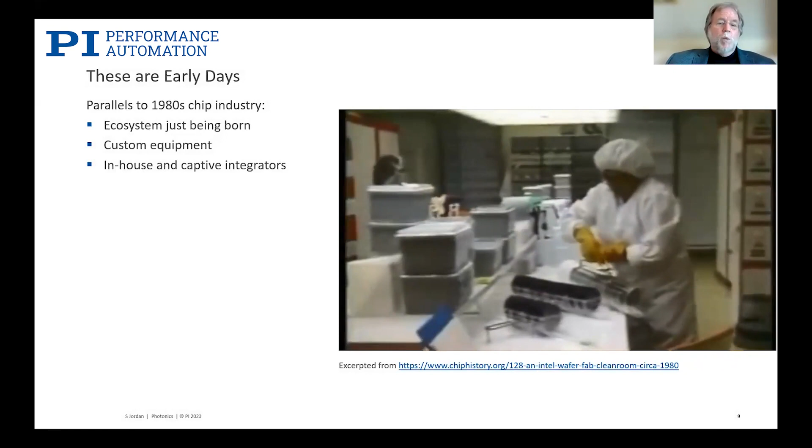As I said, the semiconductor industry showed us the way forward a long time ago. This wonderful video from the Chip History Museum is an Intel fab from the early 1980s. It wasn't that long ago. This is where the CPU for your father's or your grandfather's IBM PC was being manufactured. That's what you see. It should look familiar. Lots of manual processing, lots of people involved. Isn't that just like photonics today?

But this scene you see here with all this custom equipment has been supplanted today. Today you can build a fab just by issuing purchase orders, because all of these tool manufacturers have emerged since the early 1980s. Now this ecosystem exists. And this is happening in photonics. It's happening before our very eyes.

Now, the problem, though, if you look at an analysis of where the costs are in manufacturing a silicon photonic device, you'll find that 80% of the cost is in the packaging, and specifically in the alignment process, which must be repeated over and over again, starting at the wafer level.

When you have a wafer full of chips, whether electronic or photonic, you need to test them. You don't want to invest the cost of packaging a bad chip, so you need to test it to be sure the chip is good before the process begins. Because chips are easy to kill, you need to keep testing during the assembly process to ensure it remains functional as the process goes on. This repetitive need, starting at wafer probing and continuing through the packaging process, is what drives the cost of photonic devices today.

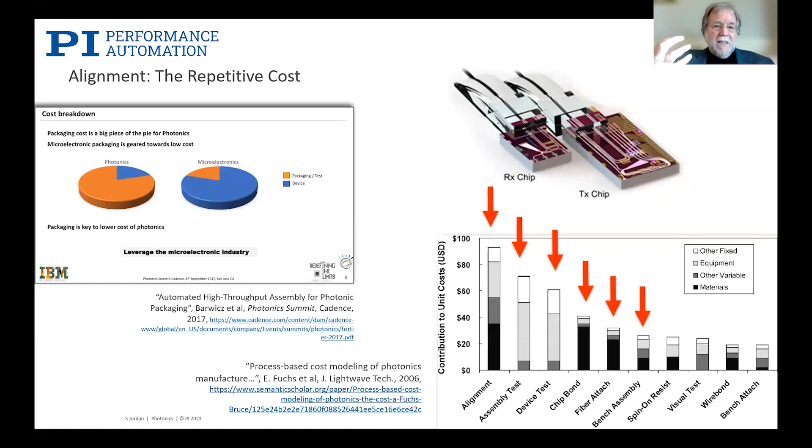Today's silicon photonic devices differ significantly from the photonic devices of, say, 1997 or 2000. They're multi-channel devices today, for one thing, so you have additional degrees of freedom involved in aligning all those multiple channels. You have a theta Z component, you have other thetas that must be correct. It isn't just in terms of transverse alignment anymore — there are also these angular degrees of freedom.

The problem is that with conventional alignment technology, every time you make a small motion in theta Z, you must stop and realign in X and Y. But there is this new technology that PI developed. It was introduced in 2016, less than a decade ago, and it won multiple awards, such as the prestigious R&D 100 award. It allows you to align simultaneously across multiple degrees of freedom, multiple inputs and outputs, multiple channels, all in one step. By doing these alignments simultaneously, we reduce the overall cost of alignment by 99%.

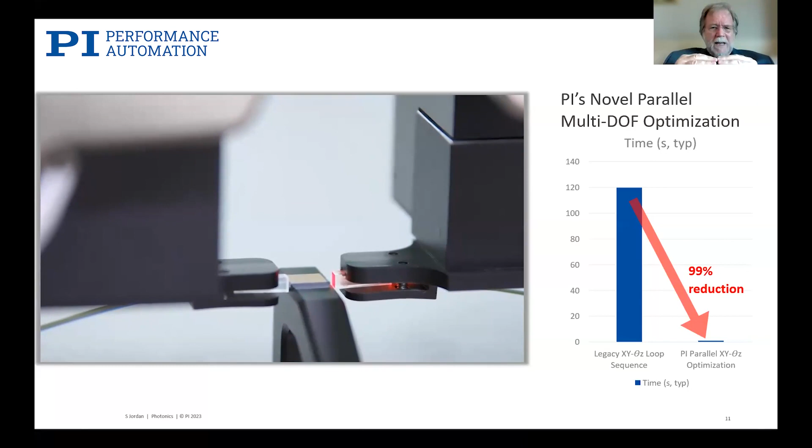Just for example, to do an alignment of an array device on a wafer can take a couple of minutes using conventional technologies. Using our technology, you could do a 6 degree of freedom alignment on both sides, input and output of these devices, in about 1 second. So that's where this 2 order of magnitude reduction in cost comes from — the unique ability to align these devices simultaneously across degrees of freedom, inputs, outputs, and channels.

Now, this is a technology that we have implemented across our product line. First, hexapod micro robots, which are highly stiff, highly stable, very rigid devices that can be mounted in any orientation and allow you to create a coordinate system wherever it makes the most sense for your application. That's very popular, and this multi-channel, multiple degree of freedom parallel alignment technology is

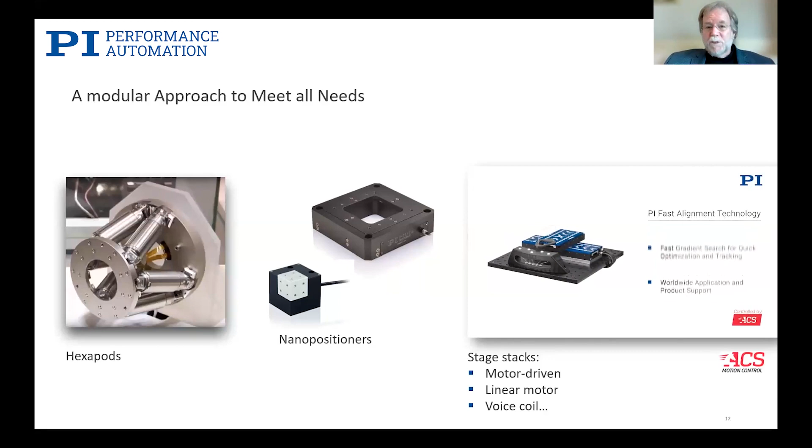just built into the command set of the hexapod controllers. Similarly, for our piezo devices, such as the popular nanocube, which is a 3-degree of freedom device, and now stacks of stages driven by the ACS controls. We purchased ACS, a very well-regarded industrial motion control manufacturer, several years ago, and now this technology has come to the world of ACS controls as well.

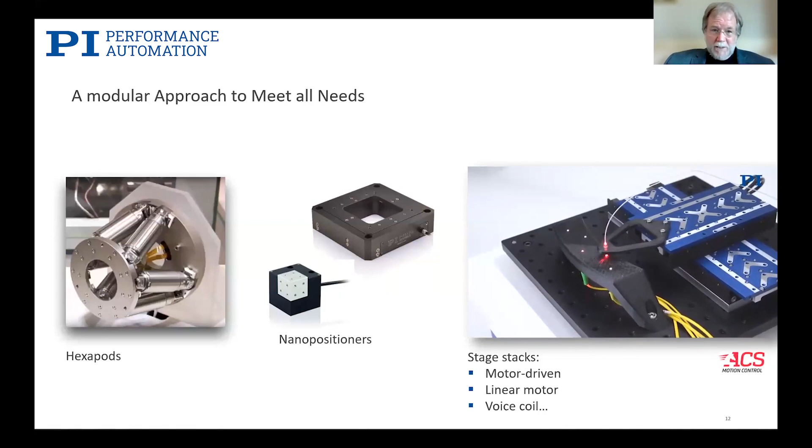So I'd like to say a little bit more about that. This gives us the flexibility to configure the optimal solution for your particular application. For hexapods, you have the benefit of this very flexible path planning and compact 6-degree of freedom, very rigid structures, no moving cables. With stacks, the modularity, the long travels, and everything driven by the ACS controls.

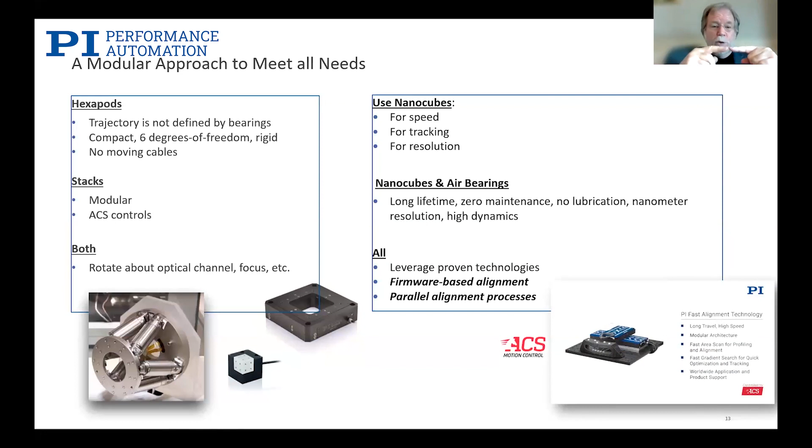Both of these allow you to rotate about a sweet spot, to be able to define a rotational center point where it makes the most sense for your application—for example, at the input to a waveguide or at the focus of a lens.

So we use piezo devices such as our nanocubes whenever there is the need for maximum speed, because piezo devices are just incredibly fast. Also, because they are flexure devices, there is no wear, no lubricants. That means they can perform long-term tracking—long-term can mean days, weeks, months, if you wish, because there's nothing to wear out in a piezo device.

Similarly, same comment for air bearings: long lifetime, zero maintenance, no lubrication, nanoscale resolution, and high dynamics. Those are the characteristics of both types of mechanisms.

And then all of these technologies leverage proven technologies, fab-class technologies. The alignment functionality is built into the firmware, which makes it fast, and the parallel capability is absolutely unique to PI.

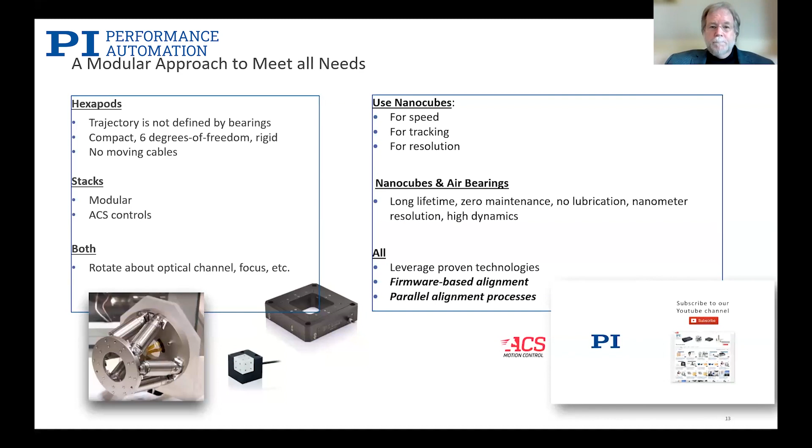So looking at some of the pluses and minuses here, now that we've expanded this to include our entire product line, you can see the virtual pivot point is available across all types of motion. Modularity is a strength of the mechanical stages, the stacks of stages. Speed is excellent for all of these, especially for nanocubes.

Tracking—long-term tracking—all of these can do tracking in the short term. Long-term tracking is something that air bearings and nanopositioners can do. Resolution is best in terms of nanopositioning and air bearing devices, and the mean time between failure is obviously going to be best for those mechanisms that have no wear at all.

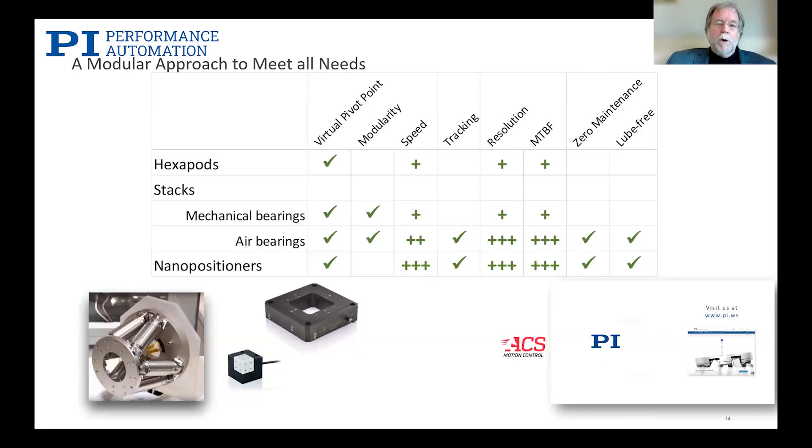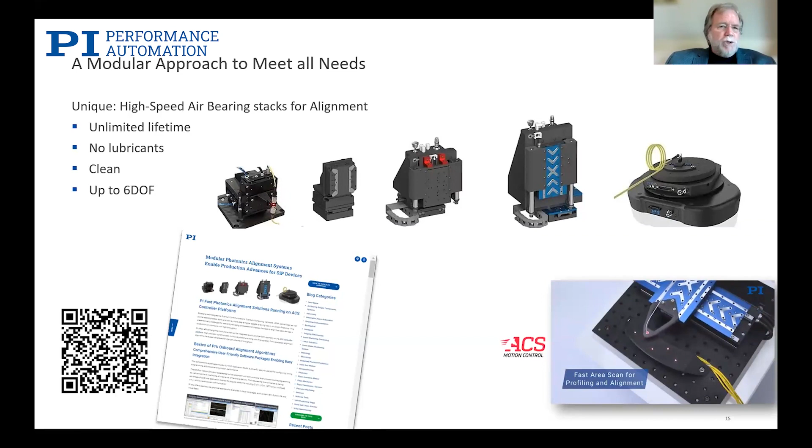This modular, expanded capability is our latest effort to serve flexible requirements. Every customer has different needs, every application is different. And we're seeing more and more large format applications with circuit boards, trays, large substrates where alignment and characterization needs to be performed over a large area. So this allows us to do that.

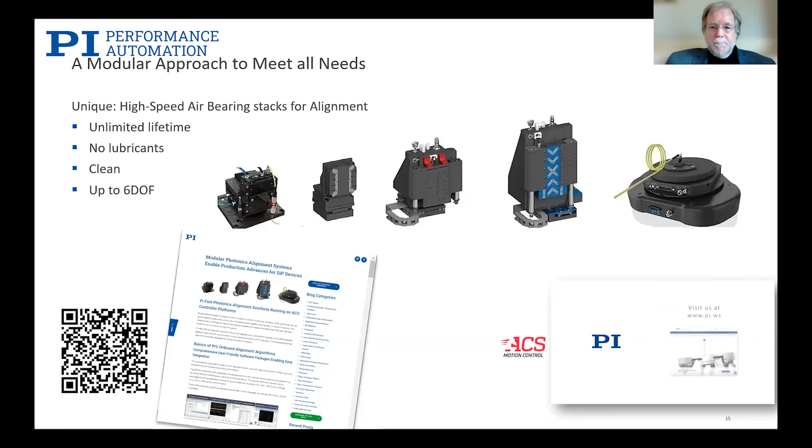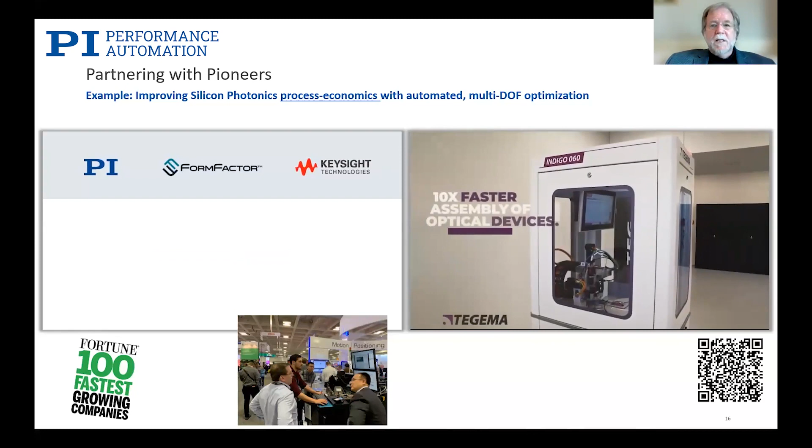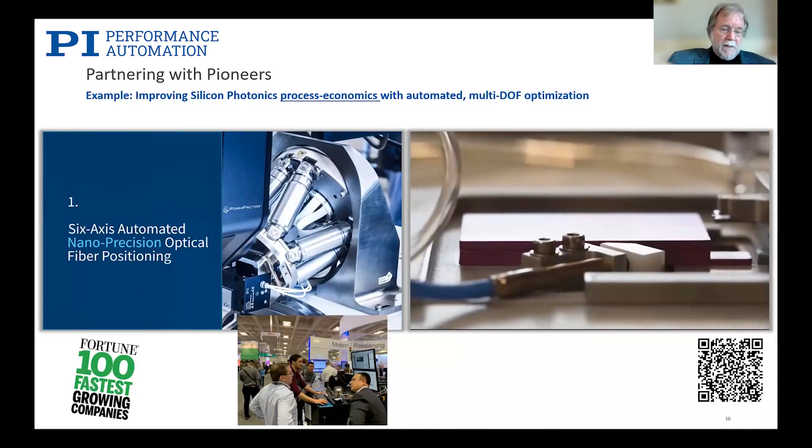Now, one thing that we have done in the 50-some-odd years of PI's existence: we have always prioritized working with the pioneers in the industries that we serve. For example, in the field of fast wafer probing, the pioneer in that field was FormFactor in 2016, showing the very first fast engineering probers that utilized this technology to revolutionize the speed and capability for testing photonic wafers.

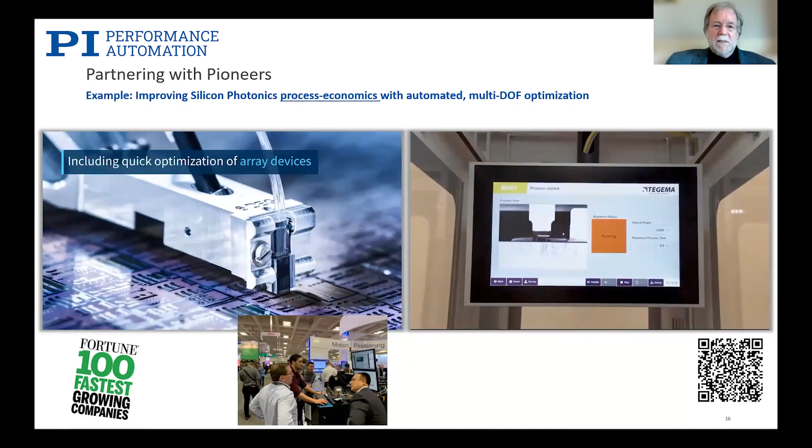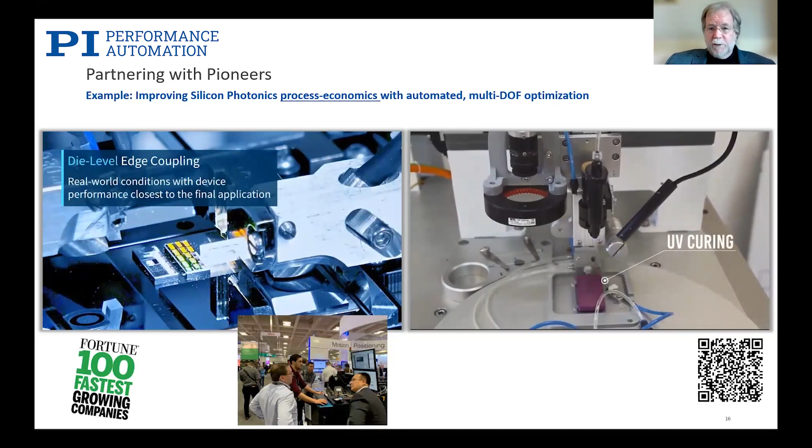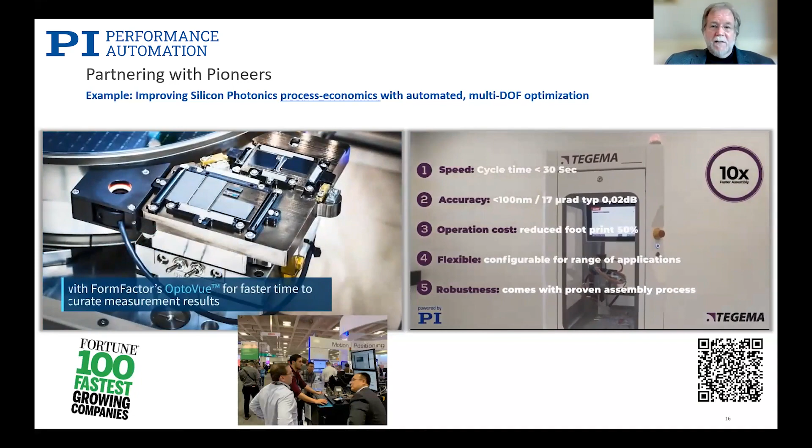Tegema is a tool manufacturer that makes assembly equipment that leverages this parallel technology that I've described. I had the great pleasure to play with one of their setups at the Photonic Integrated Circuit Conference a few months ago in Brussels. Their software is amazing, and really it is not only easy to use, fast and capable, but very capable of keeping pace with your needs and your devices as they evolve. Very, very recommended.

We've taken this approach to the whole ecosystem here. We work with contract manufacturers like Averna and GES, and with systems integrators and tool manufacturers. Remember that slide showing the Intel fab back in the 1980s? That ecosystem of tool manufacturers didn't exist then, it evolved since, and all these amazing companies sprang from that foundation. The same thing is happening now in photonics. It's a beautiful thing to see.

One thing we do: we recently opened our tech center here in Silicon Valley. This is a space for us to work with our customers, and it's also a resource for them. For example, we've had customers meet with their funders here, since they might not have an office of their own, so we help by letting them use our conference rooms and meeting spaces. Let me show you a little bit about that.

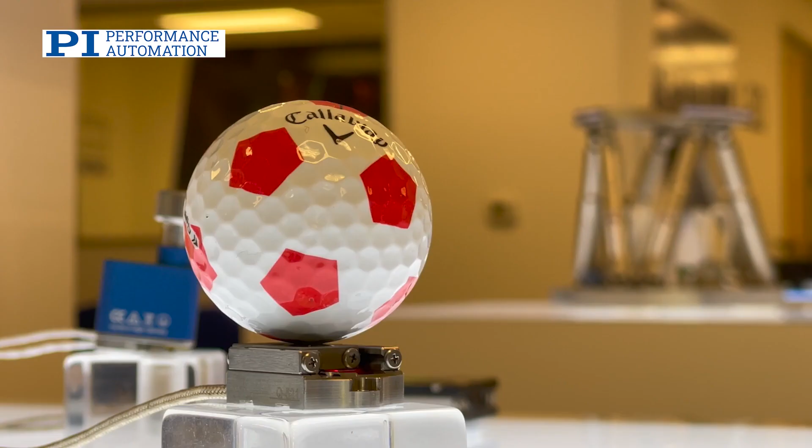Welcome to PI's Silicon Valley Technology Center. Here we address what's possible in the world of photonics today. We have a showroom with many examples of the equipment that we make, and this is the place where we have a team that can work directly with customers to solve advanced problems involving ultra-precision motion and photonic alignment.

Over in Europe, the phenomenon of pilot lines and consortia is one of the things helping drive innovation for the photonics field and others as well. In particular, there is the Photonics 21 initiative. It was established a decade ago, and it has been the motivation and significant source of funding for these pilot lines and consortia.